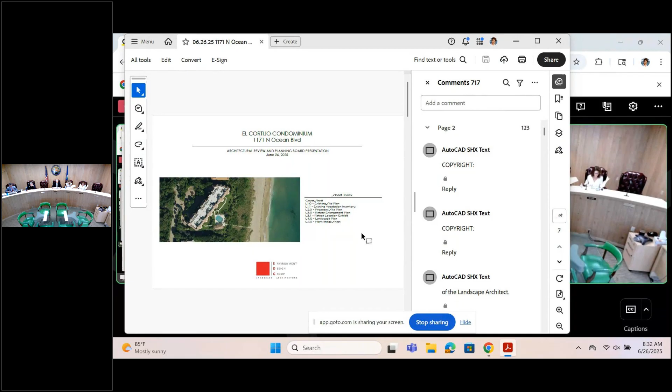That low vegetation is a mix of random plants and invasive species, so it gives us an opportunity to clean this area. At the bottom of that page there's the elevation of the enclosure. It's going to be 6 feet, so it's not a gigantic building. We're also committed to put as much vegetation as possible so it's not visible from North Ocean Boulevard.

On L3.1, it's an exhibit that shows you the overlay of the existing enclosure versus the new one. So you can see it's not a gigantic modification, and it fits inside the same area.

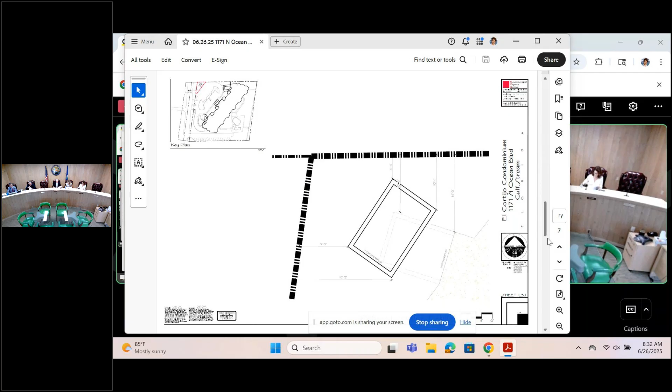On sheet L4.0, it's the landscape plan. We have ligustrum trees, which are really good, shady, thick vegetation that will help us screen that enclosure, and a mixture of lady palms and macho fern since that area is very shady. Again, as mentioned, we're going to add more vegetation if needed to screen it from all sides.

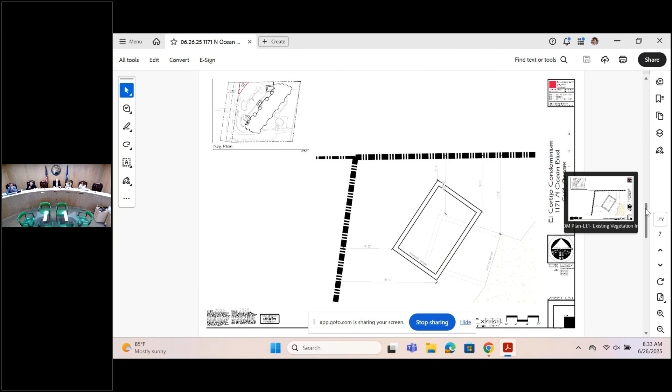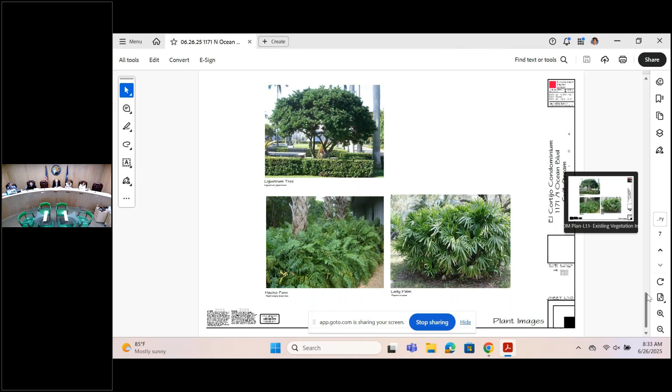The last sheet has an image of the proposed vegetation if needed. And again, just to recap, we still want to relocate the trash enclosure. We're not proposing any access to North Ocean Boulevard. There's no impact on existing trees or palms, and again, we're adding enough screening for this to not be visible.

Thank you. Do you have any questions or comments? I just appreciate that you guys have been doing this a couple of times, so thank you for coming up with this. Thank you for the opportunity to get back.

Trey, the 4.4 feet setback from the property line is acceptable because it's an... So in our review of the trash enclosure, we're viewing it more as walls rather than a minor accessory.

So because of that, we found the setback to be sufficient. And has our neighbor to the north had any comments about this, or have they been notified? They were notified originally. Everybody's notified originally, nothing. Okay. Any other comments?

If not, we can make a motion. Could we have a motion? Yes, I'll make a motion to approve a North Ocean Boulevard overlay permit for the relocation of an existing trash enclosure with landscape enhancements to screen enclosure.

I second. Moved and seconded. Mrs. Power, yes. Mrs. Orthwein? Yes. Vice Chairman Smith? Yes.

And I'll make a motion to approve a level 2 architectural site plan for the relocation of an existing trash enclosure with landscape enhancements to screen enclosure with the following condition: any minor modifications to the approved landscaping shall be submitted to the town manager for review and approval, and any major modification shall be brought back to the ARPB for review and approval prior to commencement of landscaping.

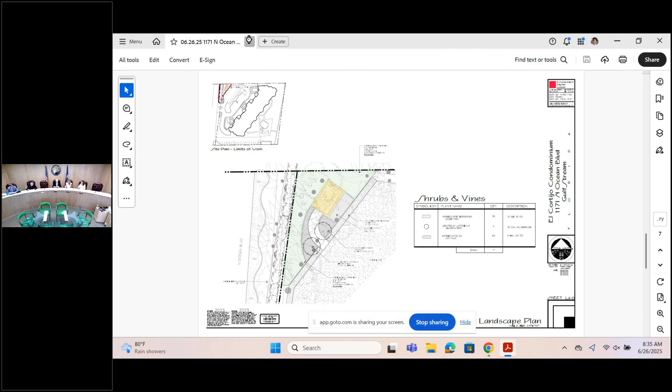Next up on the agenda is again a continuation from a deferral from the meeting on May 22nd for the home at 4120 North County Road. You're back. I'm back, I had to switch the sets. The previous presentation last month was presented by Dustin, but I'll be taking his spot now.

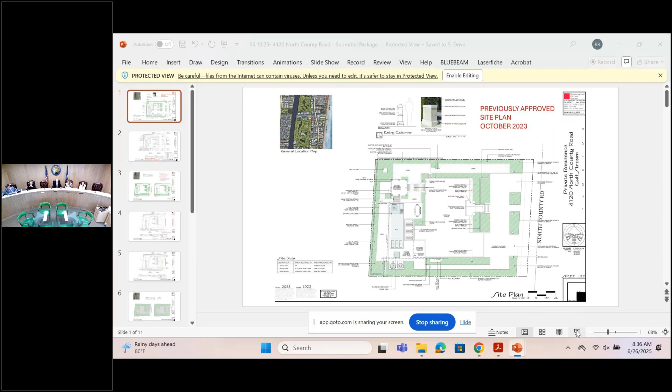In the last presentation, there was a series of changes, but the two that you guys had more questions on were the removal of the black olives on the south property line, and additional landscape in front of the street and the right of way.

After the meeting, we met with the neighbor, and she has approved the removal of the black olives. We also have an email of consent that you may have received. These are invasive species - they carry a pest that causes the staining on the house. And after the meeting, there was a burst pipe on our client's home.

Once they opened it up, it was full of roots from one of the black olive trees. So we definitely want to remove them, but we're adding more trees to replace that area, and later we'll show you an elevation.

So the first two sheets are the previously approved ARPB plan, the site plan and the landscape plan that was approved in 2023. It still had the walkways on the pool deck and also a solid walkway on the south connecting from the driveway to the pool deck. Those we're proposing to be removed.

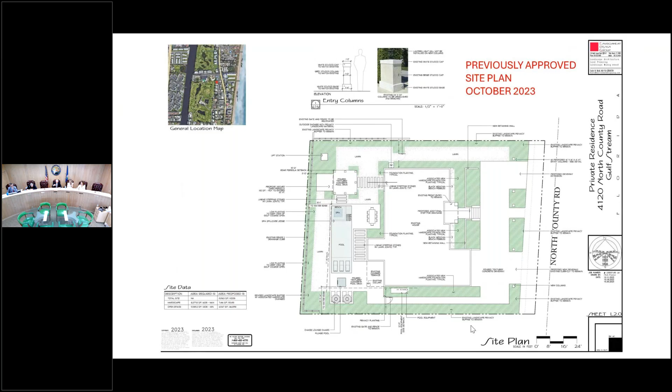And then the second page is a landscape plan, which has the 4 black olives on the south and some additional screening on North County Road. There was a 5-foot clusia and ficus green island over there.

Next sheet is all the line items that we're proposing to modify from one side to the other - the removal of the hardscape that was previously mentioned, which also helped us increase the open space, which is really good for the house.

We're not doing the steps on the bottom, it's going to be more lawn. And then some minor adjustments to the driveway - the first one had a lot of lines, and now it's a more simplified design.

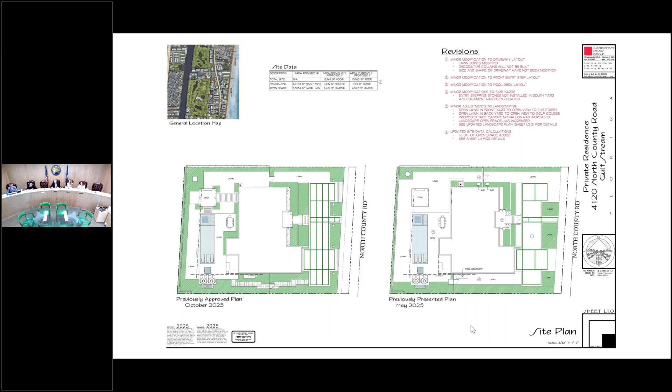So next page, please. This is the landscape plan that was presented last month. It had 5 green buttonwood trees that the board said wasn't enough.

So on the next page, we added 2 more trees, one on the south side and one on the north side, so they're more symmetrical since the house is very symmetrical. We just added to fill it in, and we also had that on the first ARPB from 2023.

We have also brought back the 2 lines of hedges. We switched the clusia for podocarpus hedge and ficus green island, so it's a 2-row along the street that will help us minimize the direct view to the house. Next sheet, please.

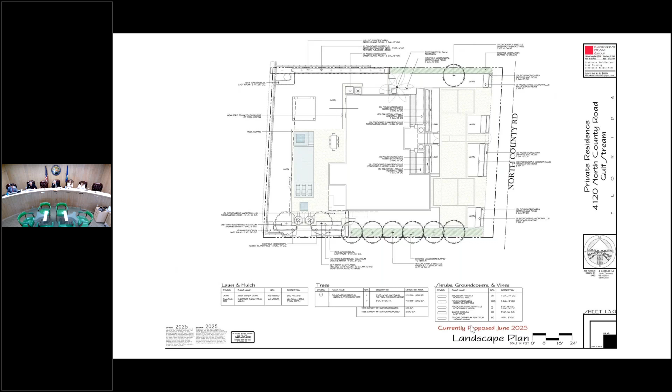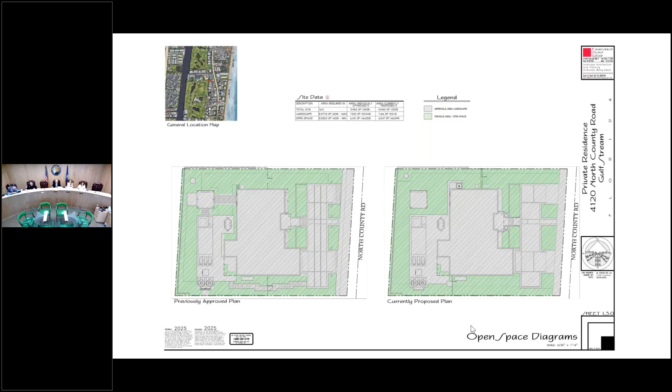That's just the open space overall increasing from the removal of the hardscape. Next page. Can you go next? Next one.

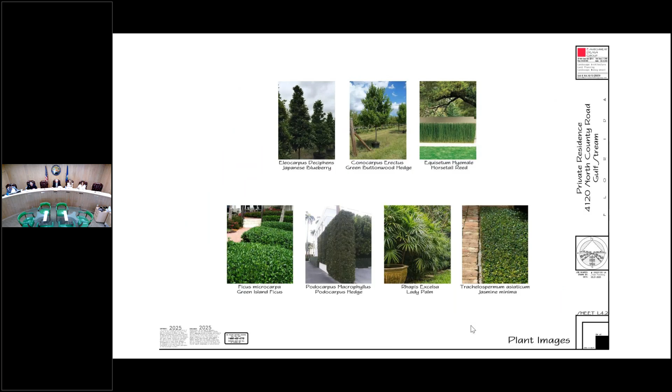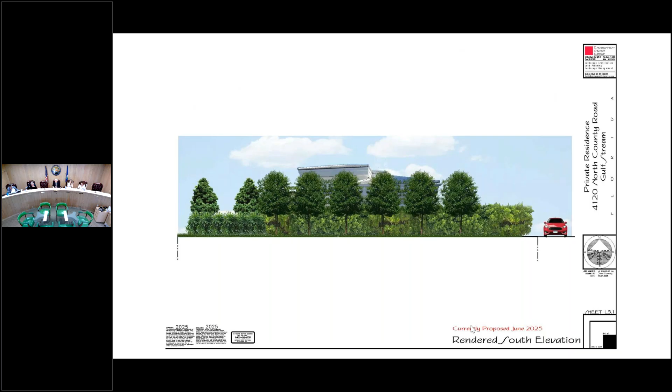You're going to have artificial turf in the driveway between the cement sections, I take it. What about on the north side there along the edge? It looked like there's a very small blade grass, or it's artificial. Do you know what I mean? If we're facing the house on the right-hand side... which one? Sorry, all right, so right there. Is that real grass there now?

We have it as grass proposed on our plan. It may look a little fake over there, but it was so natural I couldn't tell if it was a small blade grass or artificial. Is it artificial now? Right now over there, I'm not 100% sure, but the house is still under construction. Okay, but in your finished plans, that's going to be real grass. Correct.

So in watching the tape from the last meeting, you have addressed a number of the issues. Certainly there was a tree on the northeast corner, which I think you've put back in. And I think Mr. Lyons wanted more hedge work, or certainly some more foliage in the front of the house, which you're proposing. The black olive trees is the more difficult one. Now, the neighbor said they didn't object to you removing them, but there was some comment about not being sure

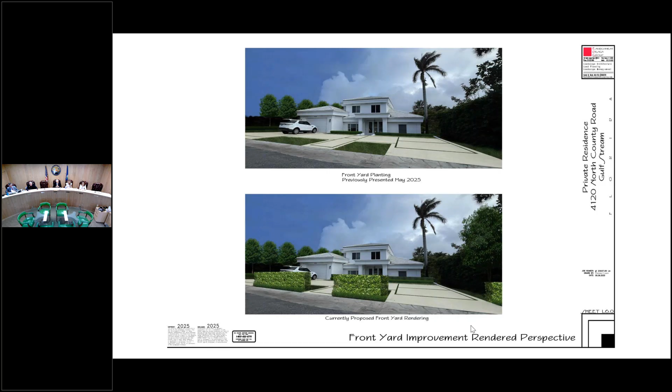Good morning, my name is Luis Rivera with Affinity Architects, and we're presenting Lot 10, Bluewater Cove. This is a West Indies style home.

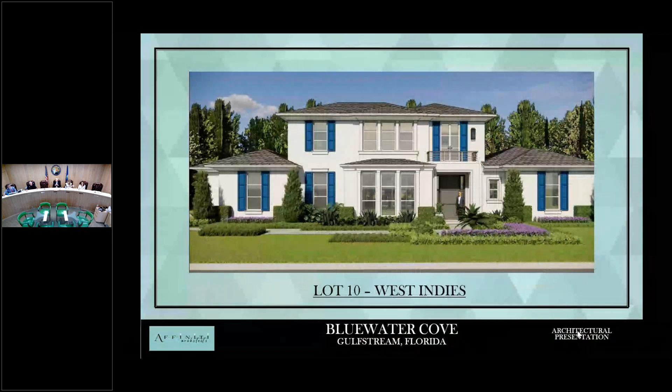This is a front elevation of it, rendered. The next slide shows the lot location in comparison with the rest of the lots. Our next slide shows the comparison of all the houses that have been approved or are in construction, comparing the elevations to our new home. Our next slide is the site plan.

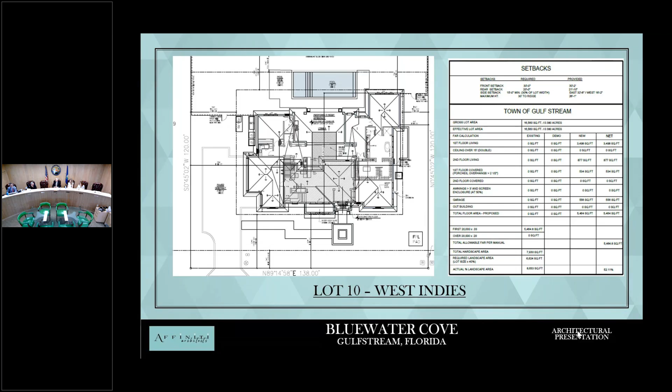The next slide, if you're okay with moving on, is the site plan, which has all the required calculations. Next slide is the first floor. The next one is the second floor.

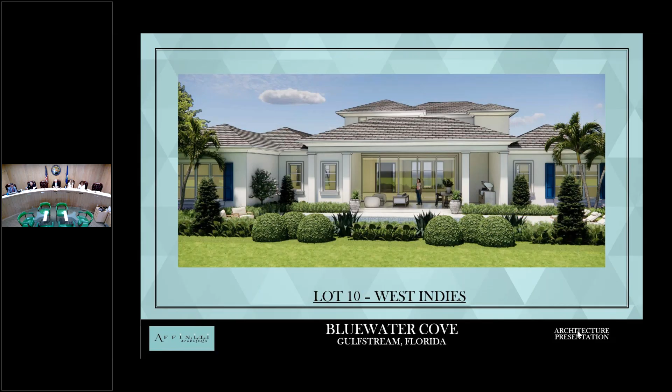Next slide is the material selections for this home and the color selections. Next, the rear elevation with some of the landscape. Next one is the 2D elevations and height limitations. Next would be the side elevations, garage side and master side.

And next would be the landscape, which my friend Louis Vlahos will be telling us about. Good morning, for the record, my name is Louis Vlahos, Majestic Views Landscape Architects.

Basically, in general, this lot is on the south side. There's an existing fishtail hedge, which has some holes in it that we will be adding to, so there are no views to the adjacent property. We have 6 green buttonwood buffer trees indicated in the rear. In addition, we have 4 matching foxtail palms at 18 foot overall, where the pool area is.

Underneath it, a combination of additional screening with podocarpus hedge, some textural stuff with alocasia, agaves, ground covers of ficus green island and jasmine minima, basically to complete that whole area.

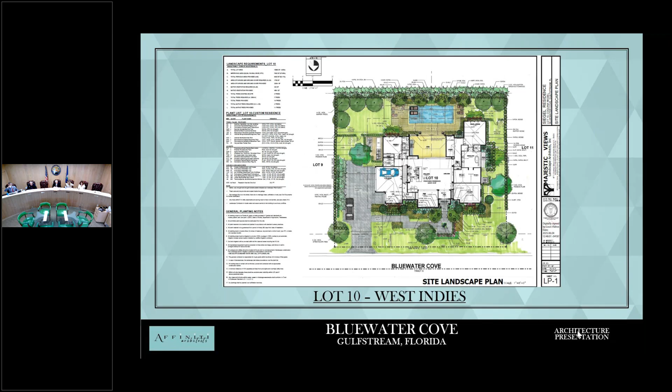And basically these are elevations. This is an existing condition showing the fishtail palms, the large foxtails, the Alexanders that are up against the house, and a similar situation in the front with the Alexanders, the MacArthur palms, large foxtails, and Japanese blueberries on either side.

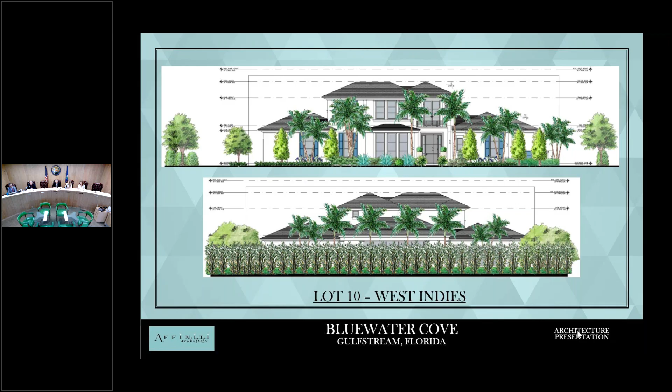And then the large oak trees at the ends, which is streetscape. There's also another streetscape oak that we didn't incorporate because it would have just blocked the whole front elevation of the house, but it's there already.

If that tree is there already though? Yes, yes, yes. On the west elevation, do you feel that the landscaping is adequate to shield that - is that the primary bathroom, that window there? Which one? The west, yeah. Yes. Okay.

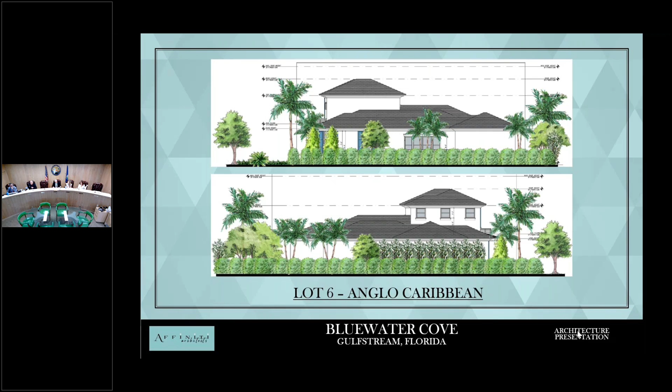No, it's a beautiful home. And if this landscaping is anything like the ones you've already finished earlier, it's beautiful and dense. The first home built looks like it's been there 5 or 10 years already. Yeah, it actually looks really nice. Really attractive - 14, the one across the street too.

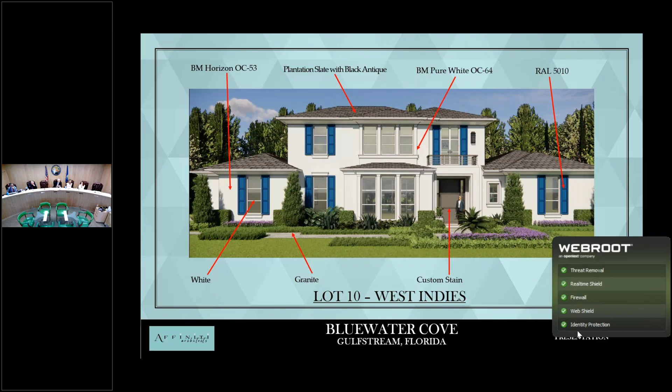That looks good. Do you have any questions or comments? Not really. I was interested in going back to the overlay of the entire neighborhood, if you don't mind, just for a second. This goes back a couple of years, when we had to change the walkways because it felt very much like a development. I just notice, if you look at the way the pools are done and everything, it's a little on the cookie cutter side with the backyards. I mean, they're beautiful, and the landscaping is spectacular, but I don't know that there's anything that creates more of a development feel rather than the Gulf Stream feel.

Okay, there are some limitations because the homes are - well, number one, we've got the 10-foot setback for the pool, and then the homes are basically at the 20-foot setback, so we're kind of limited in space as far as the pool design. We try to alternate as much as possible, whether it's the location of the spa, the steps, how it protrudes into your covered loggia, and so forth.

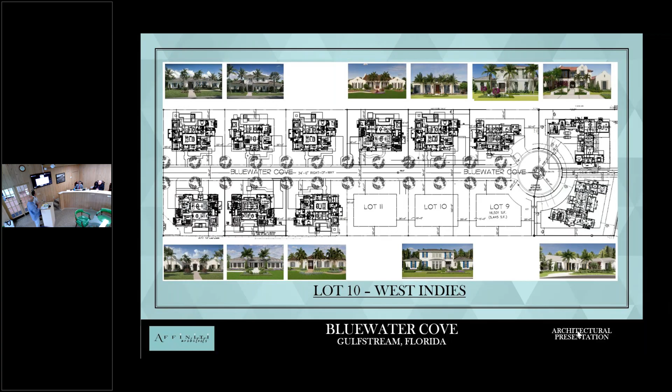At the same time, when we're looking at these, we're also looking at the residences on either side, whether being developed in the future or simultaneously, so we don't have trees in the same line, but maybe juxtaposed. So in between the homes there is that screening, and then in the rear we alternate - there might be some palms and stuff that we use, but the design is really different.

I would recommend - all the pools are different shapes. Yeah, it's by no means cookie cutter. Each unit's pool is designed - we do two concepts, they're presented to the owner, and the owner selects one concept in combination with the other one before we finalize it. So the only similarity would have to be about the size, and the size is about 16 by 36 on average for the pools.

Yeah, I was going to fuss a little bit about the similarity of design on the whole street, but I went over and looked, and you guys have done a really good job with colors - shutters, roof colors, landscaping. It doesn't look - in other words, we don't want 14 houses that are mirror images of one another. Right, you've read it in the code. I think you've done a really good job of not having that happen so far.

But as we get further in - how many are you into it? We've got eight, three of them - more, three more, yeah, we're designing 9 and 11 and finalizing those right now. So then be conscious of that for us. I mean, we're really concerned about it not looking like 14 identical homes. We are, we try.

And you've done a good job, really. When I drive down there and look at it in actual colors in the daylight, it looks great. That's what I was going to say.

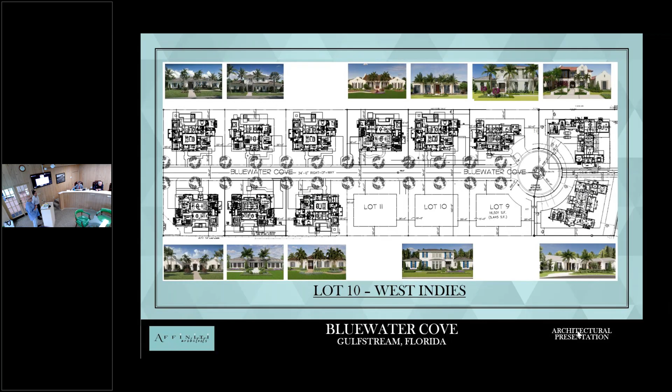Anything else? No? Can we have, Mr. Chairman? Yep. I would offer to any one of you guys a tour by staff if you'd like to go, with consent of the property owner, obviously.

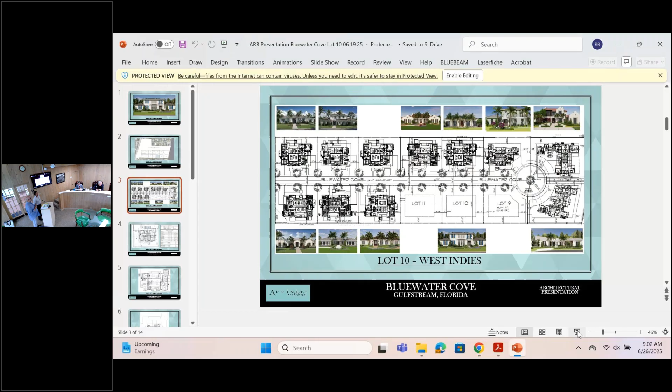Is this one owned yet? You're not building this for an owner? No, this one has an owner, correct. Oh, okay. Lot 6 has an owner, lot 8, lot 7, of course, 2 down on the end, 3 and 9, and lot 1 also has an owner. Yeah, that's got somebody in there.

So the first lot here is a model, so if you guys want to go see, you can see this one and this one. We're getting CO, I think, on this one, and we're wrapping this one up, and this one should be done next month. Feel free to go look at any of those. We're going to be closing in August on some of those new completions, so you have a little time to check it all out. Thank you.

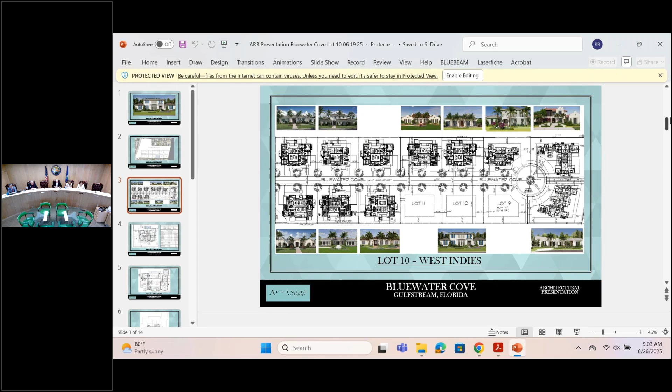I'll make a motion to recommend approval of a level 3 architectural site plan based on finding that the construction of a 5,465 square foot, one-story single-family dwelling with a 2.5-car garage and swimming pool, including new landscape and hardscape, meets the minimum intent of the design manual and applicable review standards, with the following condition: any minor modifications to the approved landscaping shall be submitted to the town manager for review and approval, and any major modifications shall be brought back to the ARPB for review and approval prior to commencement of landscaping.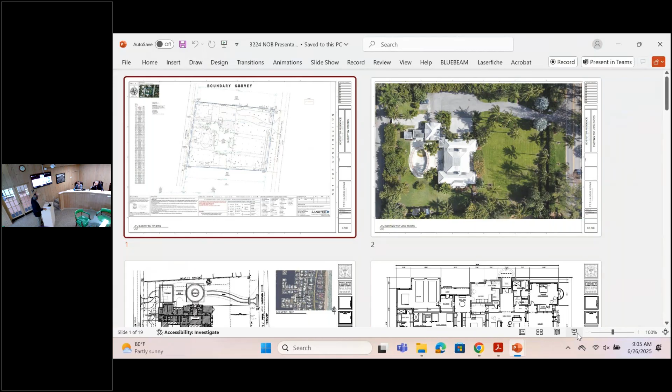I think everybody should be familiar with the property. It's one of the, I think, the most gorgeous properties we have left in town. I mean, it really is spectacular. The survey here on the top left shows the existing house.

Obviously we're going to demolish it. We were here in March requesting an early demolition, and the commission rightly suggested that we wait till the May 1st deadline without having to do a special exception. So the owners have consented, and we are now in the full process. We've kind of caught up back with ourselves.

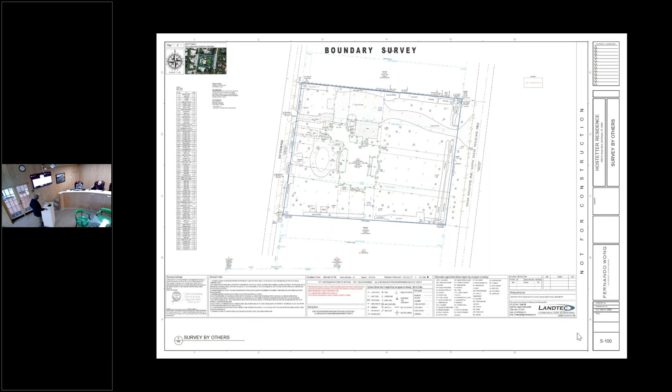The interesting things to note are the two entryways, and the aerial shows it better. The driveway on the east side, which comes off North Ocean Boulevard, is the main drive to the residence, and there's a service drive off Gulf Stream Road on the west side. Interestingly, what we're going to show you today is we're going to maintain that vehicle pattern. It seems to work, and it really doesn't disturb the beauty of especially the west, the east, and the south side of the property.

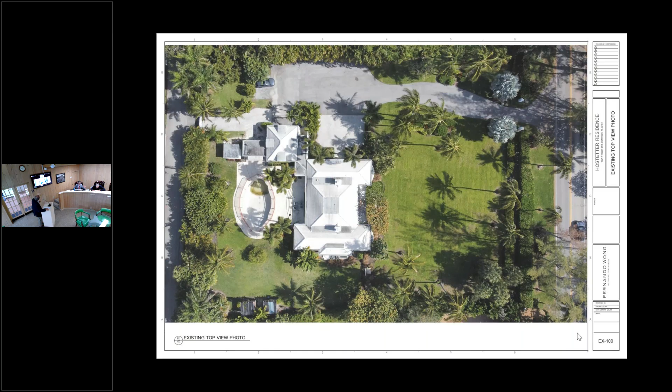So let's go on if we can. Next. So here's the footprint of the proposed new residence.

Again, just to talk about some of the technical aspects, the property is a little over an acre and a third. We are planning to do a house slightly over 9,000 square feet. By far, somebody could build 13,000 square feet on the property, so you can see the respect for the property is indicated here.

As I said, the main access driveways to the property will be maintained in a very similar location, especially the one on the east coming off North Ocean Boulevard. However, the one on the west we plan to move a little further north, just to align better, and Axel will go over this in more detail.

So you come into a motor court area, and then the house is laid out, basically single story, so it's going to have more of a horizontal development layout. And I think you'll see the house is in a very similar location to the original, so we're trying not to infringe on that east lawn.

The other thing the property has is a sense of elevation, which is again unusual for Gulf Stream unless you're on the ocean side. The current house is at plus 8; we're proposing plus 10 as the finished floor elevation. It will give even more appearance of being on an elevated plateau, or raised area, let me say, which again is a much more gracious approach to the house.

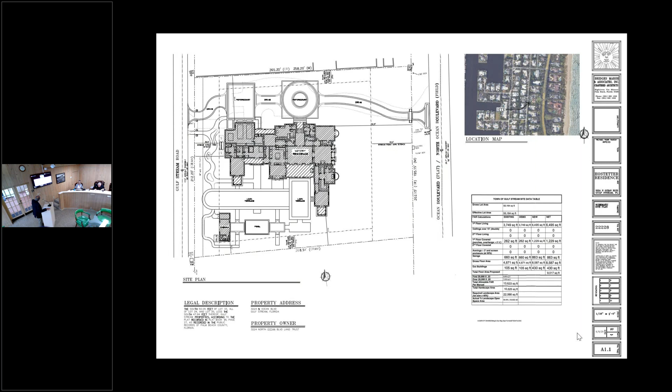I think that covers it, let's go to the floor plan, please. If you could scroll down a little bit. No, sorry, up.

The main entry is off the motor court arrival area, centered in. You come into a covered stoop, and the main front door is recessed. You come into a foyer, and the owner's program was really very defined. Everything they wanted was about their lifestyle primarily. They're an older couple with a family, but they wanted to maintain a sense of symmetry and balance in the house, especially in the arrival area. So you come in the front door to the foyer and look up. The other criteria was to see as much of the outside from the inside, so there's a direct inside-outside connection.

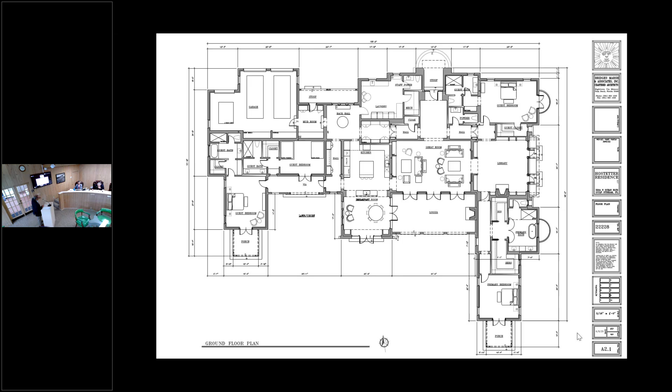You'll notice there are some porches on the roof plan. In terms of materials, which is again a very important element, right now the main house - the majority of the roofs - are going to be simple hip roofs.

There will be some areas with standing seam copper roofs, which will blend in with the cedar shake or shingle. If you've been to the Bahamas, especially Lyford Cay, you'll see these very tight, traditional Bermuda vernacular roofs. The whole house has a sense of Bermuda vernacular, which is eclectic to some point but still meshes together. The simplicity of the roof will marry all these elements together.

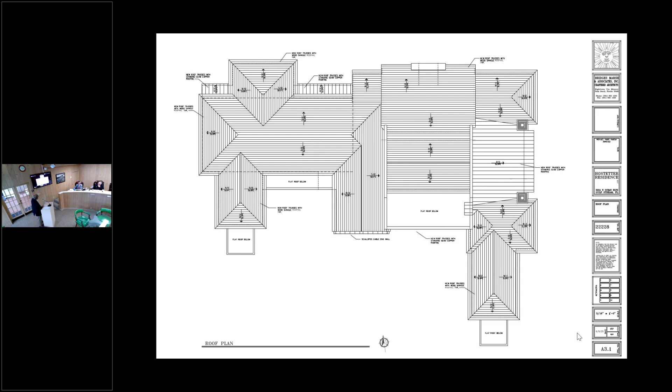There are a couple of flat areas over the loggia and the breezeway to the guest wing, intended for possible future solar panel locations, which will be out of view from any perimeter visibility. The roofs are 9 and 12, a very traditional steeper slope for this vernacular we're trying to achieve.

In terms of materials, the shingle roof colors will be distant gray, which is actually a white, not a brilliant white, more of a dull, muted white. The shingles will obviously fade and silver over time. The windows and fenestration are all colonial sizes with smaller window panes, and the window openings will have two types of shutters: either a panel shutter on the sides, or a top-projected louvered shutter.

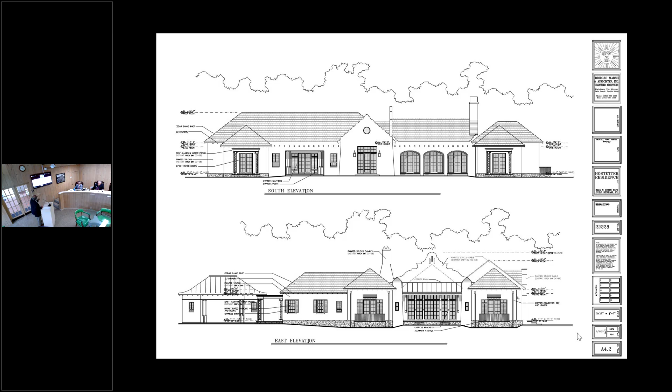So this is, as you arrive from the North Ocean Boulevard Drive, coming up the slight incline, this is what you'll see in the house. This is the east elevation. You start to see some of the coloration here. As I said, the shingles will fade out to more of a silver.

This is the library, and there's a balance here of the bedroom and the master bath. Again, a little projected semicircular balcony with simple iron picket rails. The front entry, entry of this motor court is here in the garage.

This will be separated, as I said, with some landscaping, but you can then get a mass. And then there is another Bermuda gable, which is actually in between the living room and the library, which again is a main feature. Again, very classic profiles. Next, please.

And then this is from the southwest, looking back at the house. You start to see the porches on either side, the loggia, the breezeway, the breakfast area. And you can see the proportion to wall to roof is very respectful of the style. And the fenestration. We're going to have these little outriggers from the rafters, just to give a hint of detail across that supporting beam. The fireplace is very typical of the Bermuda style.

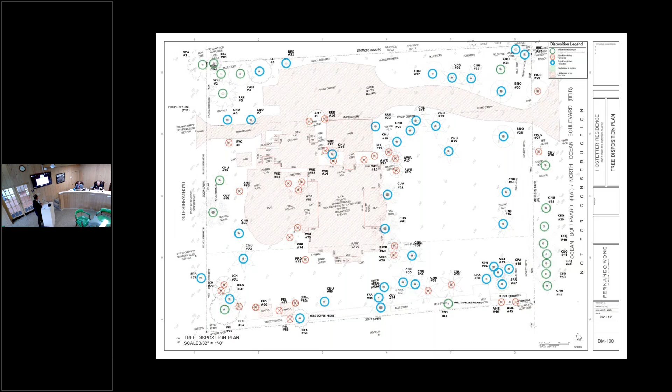This is the legend. Oh, can we go back one more, please? So this is the full list of all the existing plant material on the property. It's labeled whether it's to remain, remove, or relocate. All of the trees have been surveyed. There's a full arborist report on all of the existing trees and palms, which was also useful for us to incorporate them into the design.

Most, if not most of the plant material that's on the property will remain. It'll just be relocated to fit within Fernando's design. Next, please.

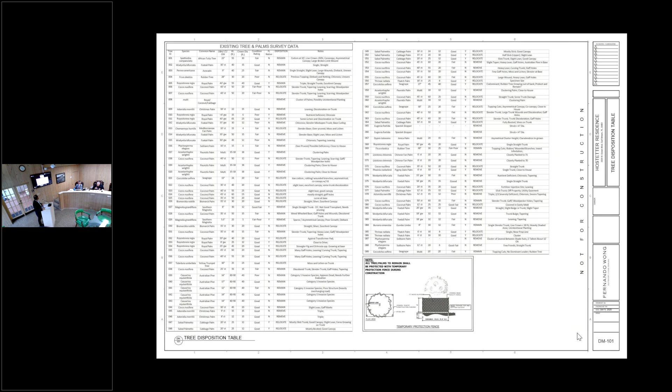The north and south will be planted with calophyllums at 24 feet overall planted height, and then the east and west side will be done out of sea grapes. The green symbols are the coconut palms. The existing ones are anywhere between 30 to 45 foot of clear trunk. They're all meant to remain, and then we will also be bringing in some additional palms to balance out the scale.

As Mark was saying, it's all about symmetry and what ties the property together. So these two trees will align everything. It'll be seen throughout, and this is the master bedroom, so this tree is my focal point.

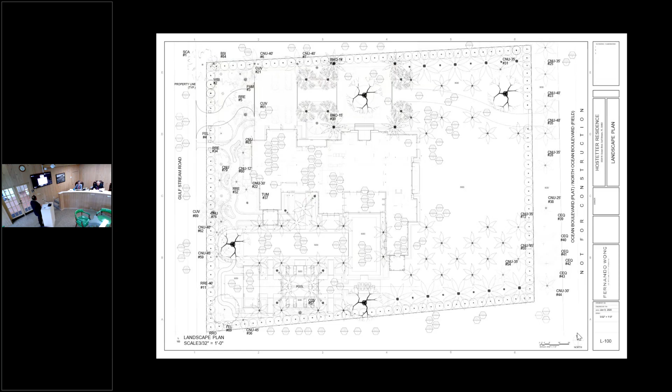This is the full landscape drawing where everything's quantified and labeled. Next, please. And this is the plant list showing all of the proposed plant material.

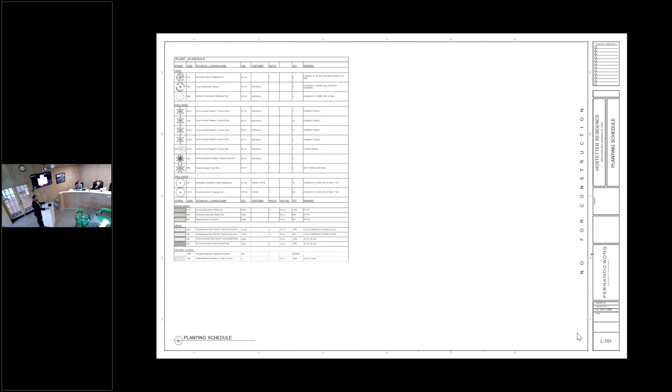Do we have any questions? Could you just clarify on the motor court and where the garage is—what is that material you're proposing? So in the circle and then right—can we go back? Go back one more.

Can we zoom into this a little bit, please? What is that—it looks different because it's different than the drive material. Yeah, so the border will be done out of coral stone, a 12 by 24, and then it'll have an inner border of an 8 by 4 inch brick size. It all has—we have a border, inner border, and this will be done out of the regular coral stone. It'll be grouted and filled.

We go back to the three borders, the specimen tree in the center. So what ties them all together is, in the coral stone, we'll have 4-inch joints of sod to separate, but the larger area in front of the garage will be all coral stone. And where's the tabby concrete being used again?

PT5s. Right, okay, so that's the drive itself. Okay, yeah, okay. And all the PT5s will be done out of the tabby, tabby held in with coral stone.

And everything along the east side—we wanted to keep and preserve the open lawn space and the view, which is why Fernando decided to place the coconuts in that pattern. Any questions?

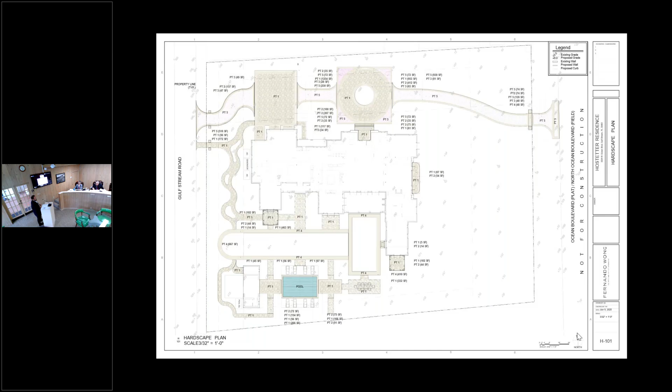You said you could use paspalum grass—all the grass will be paspalum? Correct. What's there now, St. Augustine? Yes, St. Augustine.

You were talking about the feature tree and the motor court, and at the end of the symmetry north and south. What was that tree again going to be? It would be a banyan. A big feature, kind of a banyan tree? Yeah, they'd be coming in at 45 feet overall.

All of them sort of the same size? Yes. Is there one in the northeast corner now? You've got one in the sketch here, on the northeast, going to be put in also? And this one's new. Okay, new. And there's an existing one down here, which is meant to remain.

These symbols all in the light gray are all of the existing plant material that's meant to be relocated. The property currently has 2 sea grapes kind of in this spot, and they're going to be planted here. And then we're bringing in 4 more to match the same specs, which is 25 feet overall, 6 to 8 inch DBH character trunks.

I'm sorry, I didn't catch the size of the tree on the west. Of the existing one? Yeah. On the Gulf Stream Road side. It's probably maybe 45, maybe even 50 feet overall height. Okay. It's down here.

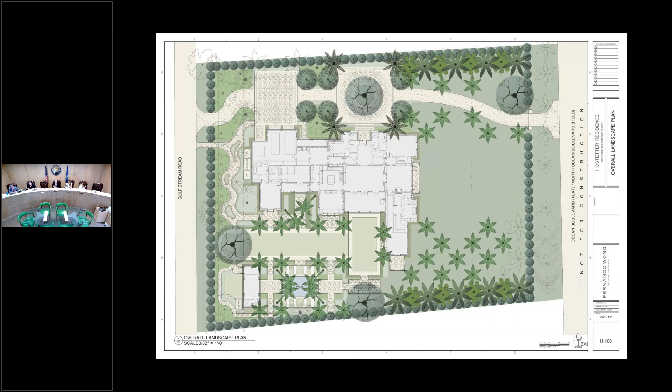Yes. All right, I'd like to make a motion to recommend approval of a level 3 architectural site plan based on a finding that the construction of an 8,587 square foot Bermuda style 1-story single-family dwelling with a 2.5-car garage, swimming pool, 430 square foot pool cabana, new landscape and hardscape meets the minimum intent of the design manual and applicable review standards with the following conditions: any minor modifications to the approved landscaping shall be submitted to the town manager for review and approval, and any major modification shall be brought back to the ARPB for review and approval prior to commencement of landscape.

A second? Mrs. Power? Yes. Mrs. Orthwein? Yes. Vice Chairman Smith? Yes. Thank you very much.

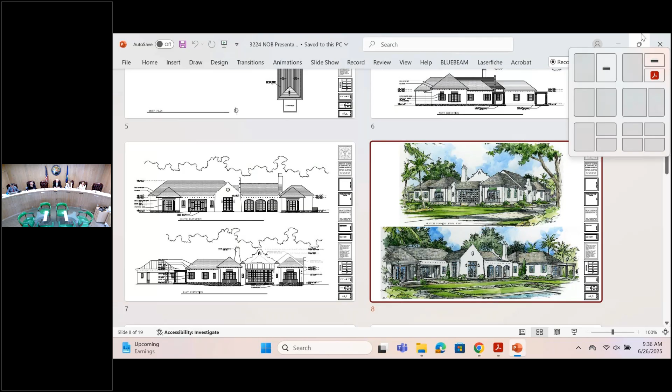Thank you, Mark. Beautiful. When are you going to start the demolition? Don't ask Amos, please. No, we hope to be breaking ground sometime in October, November. Oh really, so you're going to wait and demolish right before you start? We might do it earlier, just to get the feel of the property better. That was the intention originally before we started the design. Looks nice. It's before October, really. Keep kind of the history of the town intact, so appreciate it. Thank you.

Okay, are there any items by staff? No, sir. Items by board members? No. No public.

Do you need us for a second, Mark? I was just - oh, okay. I'll talk to him, man. Okay, sorry, thanks.

At this point, we're trying to resolve more potential issues that would come before the boards at the staff level, which includes having more than one pre-application meeting if needed. So with the trash enclosure, that was something they were - I don't want to say hell-bent on, but that is what they wanted. And we tried to talk them out of it, said we were going to recommend denial, but it's harder being multifamily - it's not just one person you're dealing with, it's a property manager, they've got direction from a board. So it's a little bit more complicated to say, let's pause, if you have a problem let's deal with it, let's talk to our waste hauler. So they had already had all these meetings and provided direction.